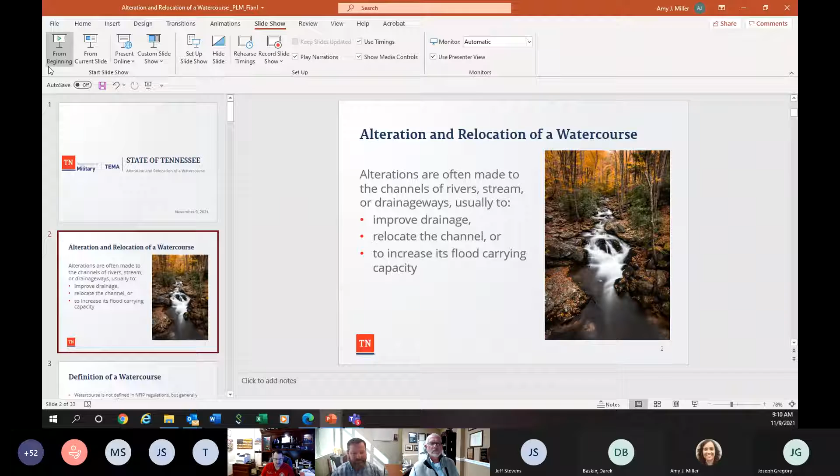Let's talk about stream alterations or relocations and what that means specifically for floodplain administrators. When we think about an alteration or relocation of a watercourse, really what that means is changes made to the channels of a river, stream, or drainage way. Most of the time it's focused on improving drainage for the area, maybe relocating the channel or trying to increase its flood carrying capacity.

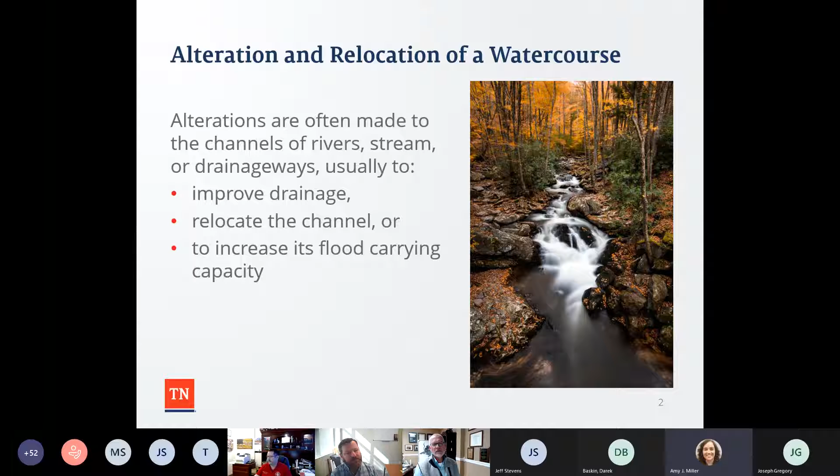The definition of a watercourse is not necessarily defined in the NFIP regulations, but it really means the channel of a river, stream, or drainage way, not the adjacent overbank areas. If there's placement of fill in the overbank areas but outside the channel, it's not considered an alteration or relocation of a watercourse. The overbank areas are addressed under the NFIP floodway requirement.

So if there's any kind of improvement, change, grading, filling, or excavating of a floodway area, there has to be an engineering analysis, and that's part of the Tennessee No Rise guidance document. Watercourses include not only rivers and streams that are the source of flooding, but also smaller streams, drainage ways, and ditches within the floodplain.

Having a site plan is really important to show what's there on the ground, and even going out and doing an inspection to see what's going on the site. Sometimes you can have unmapped streams going through a piece of property, and if someone is putting in a culvert or changing or altering it, that needs to be addressed. So having good over-the-counter consultation is important.

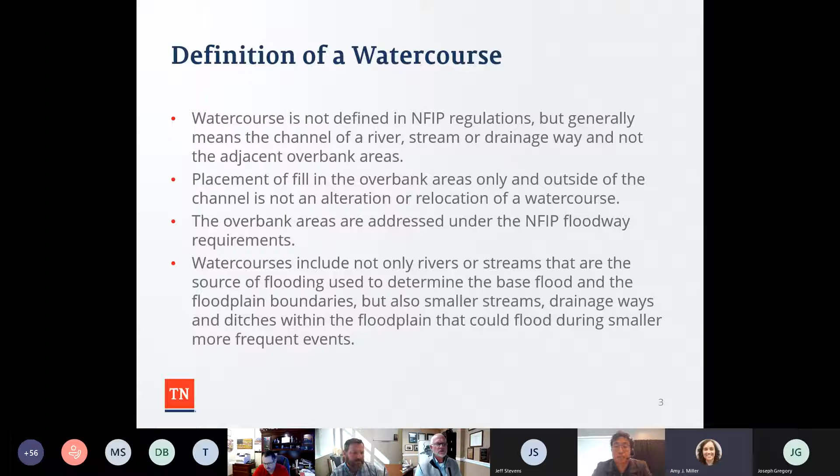When we think about having an alteration or relocation, there are two requirements that must be met to maintain the flood carrying capacity. First, it has to have the same or greater capacity as the original watercourse. Additionally, once it is altered, the capacity of the altered or relocated watercourse must be maintained over time. A lot of times you can see where a stream has been altered or relocated, and over time, Mother Nature will try to put the stream back to its original location.

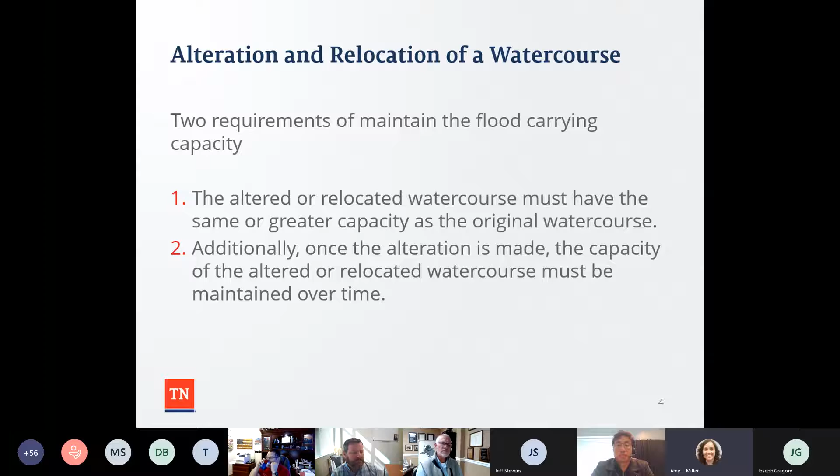So whenever there's going to be a change made to a stream or a body of water, you want to make sure that is maintained over time, and how the property owners or the community is going to address it is important when talking about these types of projects.

Floodplain administrator duties—I can't stress this enough. A lot of times when a floodplain administrator has a question or there's a project coming into a community, the first thing a lot of y'all do is get a little anxious or upset about it. But the thing to do is sit down and talk with the applicant about what they're proposing. The next thing to do is look at your local floodplain regulations to see what certain criteria need to be met.

I met with a floodplain administrator about 2 weeks ago, and she said, hey, what are our elevation requirements? I don't see anything within the document. So I asked her to go get her resolution, and we flipped a couple pages beyond where she was at.

And she said, oh, I haven't read that far. So some of you guys, when you have downtime, I'd encourage you to sit down and look at some of the different requirements, whether it's for recreational vehicles, manufactured homes, floodway requirements for zone AE, zone A, unmapped streams, what a variance should be allowed, or what the process is. Because some of your communities have planning commissions, boards of aldermen or county commissioners, and some of you have the 4-hour yearly training and aren't quite sure what topics to cover. The National Flood Insurance Program would be an awesome topic, or hazard mitigation grants. There's a plethora of different topics you can talk to your local community about. So if you haven't taken the time to read your regulations, or aren't quite sure what's what, now would be a great time to do that.

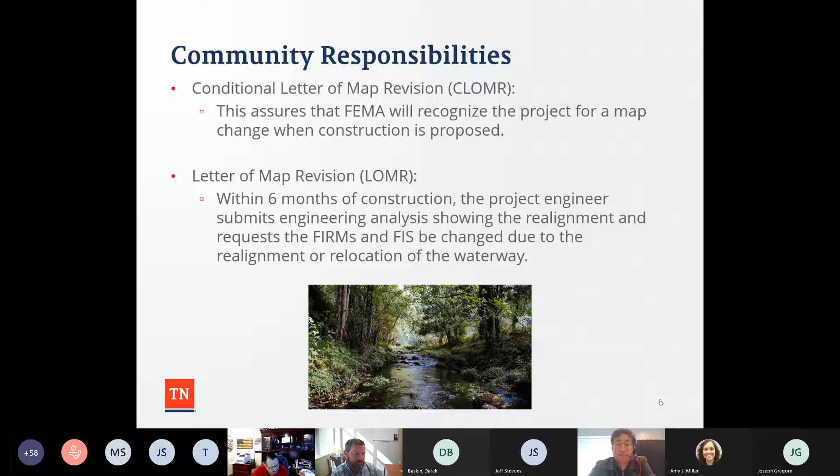So just as an added bonus for you all, sometimes when we talk to different stakeholders, project engineers, applicants, they always ask where this regulation came from. As we've talked about numerous times, FEMA has a Code of Federal Regulations that documents all the program standards. So sometimes people say, well, it's just Amy Miller standards, whatever Amy says, that's what you have to do. And it's not my requirements, it's FEMA's requirements.

So 60.3B6 essentially says that you have to notify my office prior to any alteration or relocation. And then B7 talks about making sure that the flood carrying capacity is maintained. So even though that's within your regulations, it is a federal requirement for all 22,000 plus communities that if there is any kind of alteration or relocation, that my office is notified, adjacent communities are affected or notified.

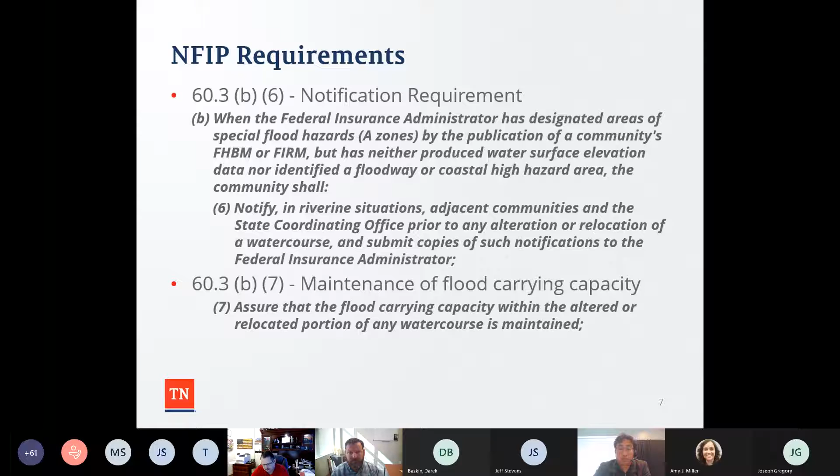So for carrying capacity, the National Flood Insurance Program again has to be applied to all water courses that are in a mapped floodplain. A lot of times we see work that's done in a Zone A for rural communities where no base flood elevations have been provided by FEMA. And requirements are particularly important because if there are no floodways designated and no other requirements, that would preserve the flood capacity to maintain those floodwaters.

So if you have a Zone A stream, there's going to have to be additional work done by a surveyor to survey the area to delineate where the floodway would be, that main channel, and then doing elevations to see the impact of the relocation or alteration, and then also addressing flood carrying capacity. So sometimes you can have a Zone A stream going to be altered or relocated, and then you can have additional technical data that can maybe take that from a Zone A to a Zone AE with some additional information that can make additional development in the area better because you have that detailed information.

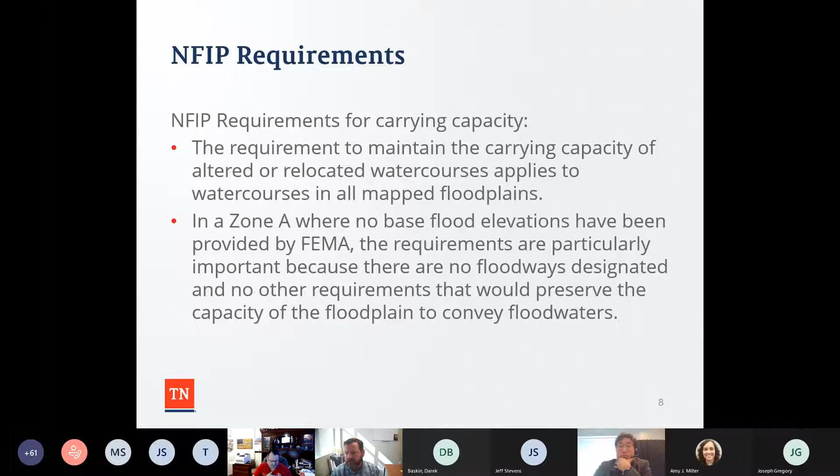So failure to maintain carrying capacity can create numerous flood problems. A lot of times, especially since COVID has started, I'm the angry citizen hotline. A lot of people will sit at home and they will watch their neighbors and they will see that they're doing different types of activities in the floodplain, whether permitted or unpermitted, and they'll call my office and say, hey, my neighbor's putting fill near the stream bank, or my neighbor's putting fill on the lot. Every day it's a different phone call with a different issue.

So again, you want to make sure that with this, that it's going to be maintained. Because one thing that we talked about yesterday with a county mayor was talking about subdivision regulations and especially stormwater management. One thing that I always ask whenever I see a major subdivision that's in the floodplain, the question is: is a culvert going to protect for the 1% annual chance of flood?

A lot of times when you guys get various development packages or projects, stormwater management is really important, because if it's not going to protect to the 1% annual chance of flooding, then what can happen is when you have a flash flood event, if it's only protecting for the 10-year storm event or 50-year, when you have a flash flood event, folks are going to experience flooding in their backyard or potentially in the subdivision or their homes.

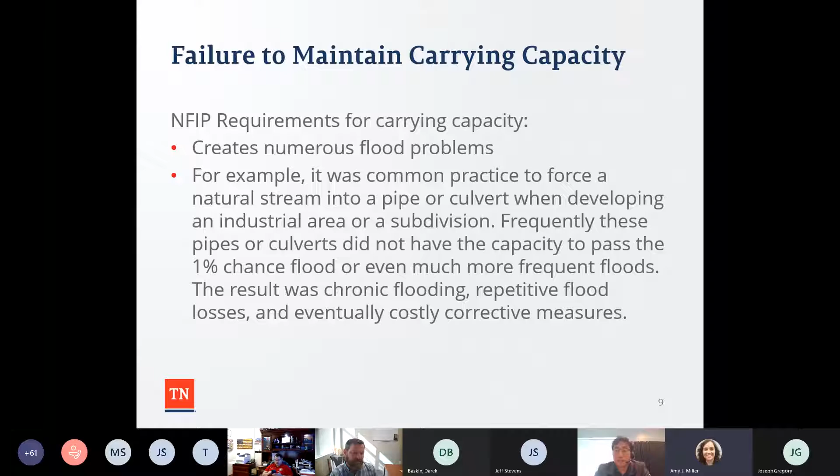You want to make sure that when you're having a major subdivision coming into your area, whether it's in the floodplain or not, the engineer addresses and you know what level of protection that culvert or pipe is going to provide, especially for industrial areas or subdivisions over time. I met with an individual last Friday and we were talking about a major subdivision near a Walmart, where when it rains, water drifts from the retention ponds of Walmart into the subdivision, and their culverts and pipes don't address all that stormwater over time. So it makes it really difficult.

When we think about Zone A, Zone AE, and alterations, Zone AE with a floodway, you want requirements to continue to apply to the channel of the river or stream. The floodway designation will prevent encroachments in the floodplain that cause more than a 1 foot increase in the flood stage. And again, the 1 foot is part of the Code of Federal Regulations.

If there's anything over a foot and there are insurable structures, and you submit that engineering analysis to FEMA as a conditional letter of map revision, they will deny it. That's part of those regulations right there. Again, notify my office and make sure that you maintain the flood carrying capacity.

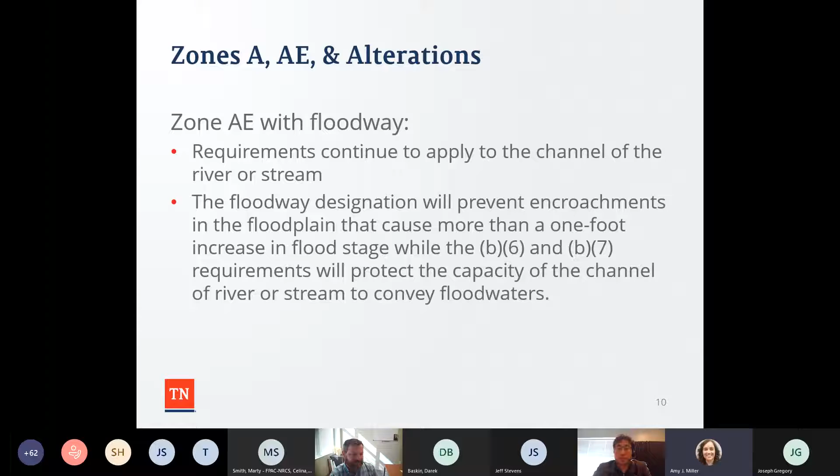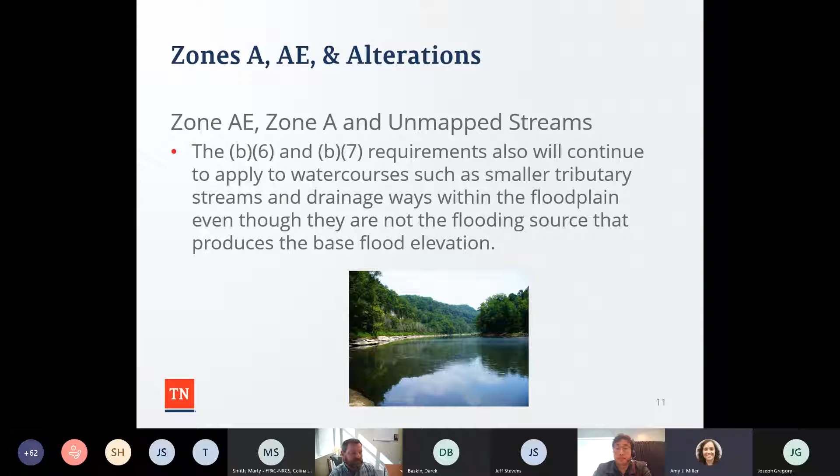You want to make sure it applies to the water courses and smaller tributary streams and drainage ways within the floodplain, and that it doesn't produce additional flooding in areas, as we talked about earlier. For Zone A streams, the analysis can be as simple as a community engineer reviewing the proposal.

But again, I would caution that if you have a proposal submitted, it be submitted to my office. Unfortunately, we've had over probably 110 submittals, and we have not had a complete application package, nor a complete and correct submittal.

So to take some of that liability off local communities, engineering reviews as part of my office are always available to every single community, because we want it to be compliant. If it isn't compliant, there could potentially be a lawsuit, whether from the project engineer or against the local community for not enforcing the regulations.

Whether it's Zone AE, Zone A, or unmapped streams, you want to make sure there's an engineering analysis when there's an alteration or relocation, and that the channel size and cross sections are as big and the channel is as straight as the original water course, with smooth hydraulic transitions into and out of the altered or relocated portion.

That's really important because you want it smooth so that when floodwaters enter and exit, you're not causing additional flooding to adjacent properties. Also make sure the sides and bottoms are the same or similar materials to the original water course, and look at the roughness coefficient—is it smooth, rocky, or is there sedimentation or other factors?

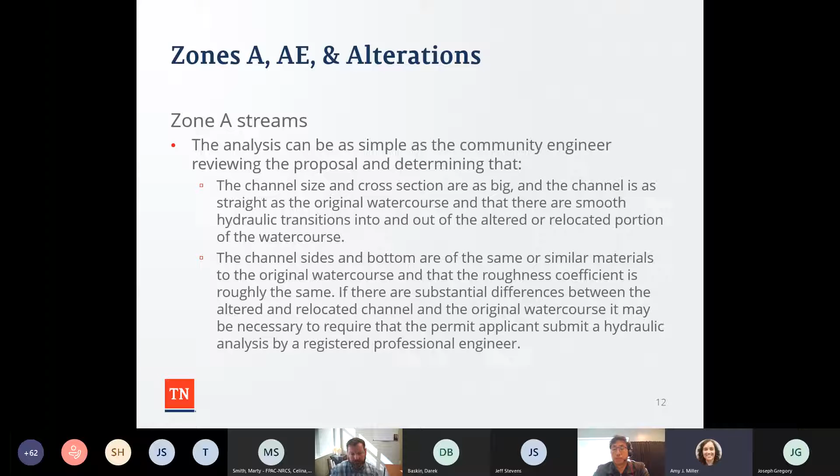So in a non-maintained water course, sometimes an artificial condition is created and you can have erosion of the banks and sedimentation could occur, which decreases the capacity of the channel to carry flood flows. Sometimes someone altered it, and over time Mother Nature tries to meander it back to the old location, and vegetation can grow, choking the area. Any benefits from the original project can be lost, and flood hazards can increase.

Now, a lot of times whenever there's a flood event, one of the first things I hear from folks is, well, just go in and clear out all the vegetation in the stream bank, allow the water to go from point A to point B unobstructed. And we all know that TDEC will not issue those sort of permits for that type of activity. So you want to try to work with nature and make sure that when a project is being proposed, these particular issues are addressed.

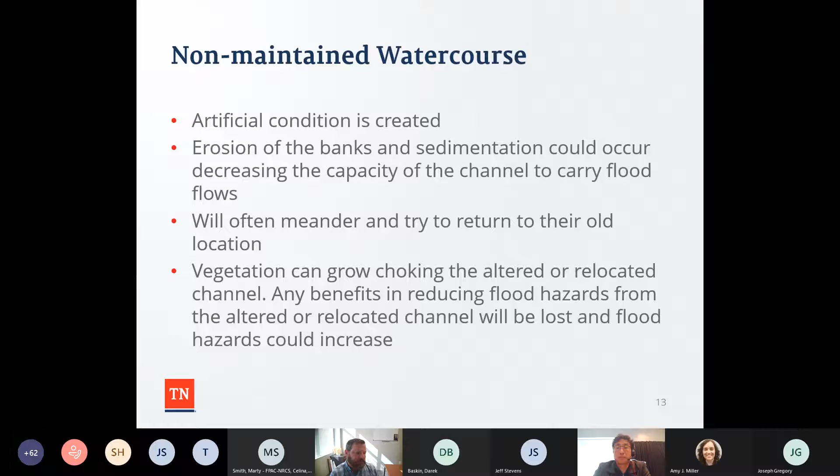So riparian management is fundamental for supporting proper stream corridor function and making sure it's a fully functioning stream. This picture here is near and dear because it's a picture from back home, cows in the stream. My agricultural education degree would say that the farmer needs to have a conservation plan to make sure the cows aren't in the stream.

But there's some other things when you're looking at riparian management, if there's adjacent agricultural operations, how is that going to affect alteration or relocation of a stream? Livestock grazing practices—maybe you have fences up so far from the stream, like farm fence, to make sure the cattle can't graze clear to the stream bank.

Forest harvesting practices—one time I was in a community in East Tennessee, driving through a floodplain, and all of a sudden the guy hemmed me in so I couldn't back up, couldn't leave, and he said, hey, there's this issue where they're harvesting trees, and every time it floods there's a mud flow that comes towards my house, I'm having issues. So you want to make sure that when people are harvesting trees, say on steep slopes, how are they going to address flooding and mudslides that could potentially occur?

Road building and urbanization all affect riparian management as far as making sure a stream functions. As Tennessee continues to develop, these will continue to be issues, especially urbanization and road building, making sure sites are reasonably safe from flooding, making sure utilities are flood-proof and water resistant, and that flooding doesn't accumulate in various types of utilities—that's really important.

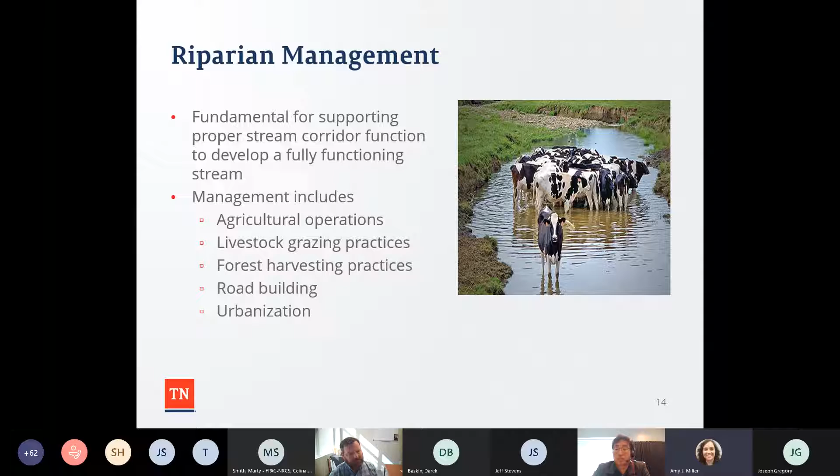Data compilation is really important when engineering analyses are being done, because the project engineer has to collect existing available data as far as current conditions, including stream flows. Some streams have gauges so you know what the stream flow is, others do not, so obtaining that information is really important.

Water diversion, water quality data, flow frequency data, biologic inventories, working with the U.S. Fish and Wildlife Service to know if there's any kind of endangered species, if you're going to be altering or relocating, and how that affects vegetation and animals in the area and aquatic life.

And then have aerial imagery, soil information, and elevation data. We're really fortunate in Tennessee to have LIDAR data done for the state. I believe West Tennessee will be done soon, so we'll have the whole state with LIDAR data. If you need that information, you can go to the state of Tennessee GIS website, or just Google Tennessee LIDAR data to obtain that if you're working with someone doing a project in your local community.

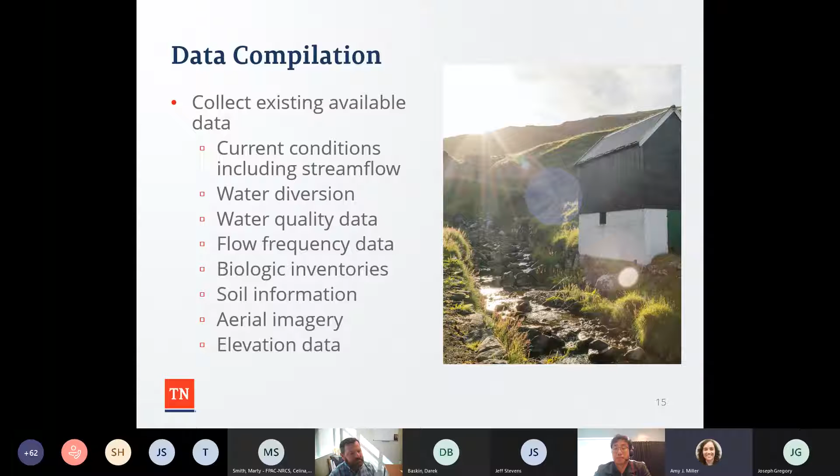Historic information—the flood insurance study guide for each community does have historic information as far as flood events that have happened in each individual community. So you want to make sure that historic data is implemented into a project to make sure that you promote the historic condition, if that's accurate.

If you guys were ever to go to Ohio State, there's Mirror Lake. It used to be just a round kind of circular lake, and then they decided to go in there and reconfigure it, realign it back to its historic condition, so that when there's a flood event, the stream and the pond are back to how it was a long time ago, and the elements that led to the degradation have been alleviated.

So again, understanding the impacts of the stream, some of the issues that it has, and making sure that you put that into the project is really important.

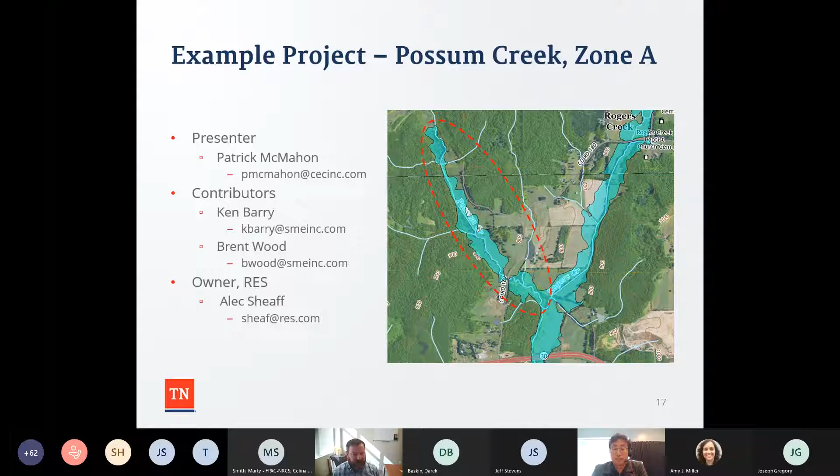So when you get into these projects, the first thing is due diligence, getting together a meaningful and complete proposal. From the engineer's standpoint, one of the first things we're going to do is go look at the flood damage prevention resolution or ordinance in that county or municipality and make sure we understand how it is set up. There is the blanket ordinance you can adopt that has all the requirements you would need to address to be in compliance with the NFIP program.

Some communities adopt more stringent requirements, and then there are some gray areas where communities will do a few different things with their program to meet their needs in the community. So we first want to get really intimately familiar with that information.

The second order of business is to contact the floodplain administrator, who is a critical piece to the NFIP program and process whenever we're working in floodplains. So we want to get involved with the floodplain administrator very early and start talking about the project. In this particular instance, immediately we were running into some challenges.

We got into the flood damage prevention resolution and said, okay, great, it's the county planner that we need to be talking to. So we reach out to the county planner, and we're not getting any responses. Come to find out, unfortunately, the county planner had recently and suddenly passed away due to natural causes, and the county was a little bit at a loss for reassigning the responsibilities of the county planner.

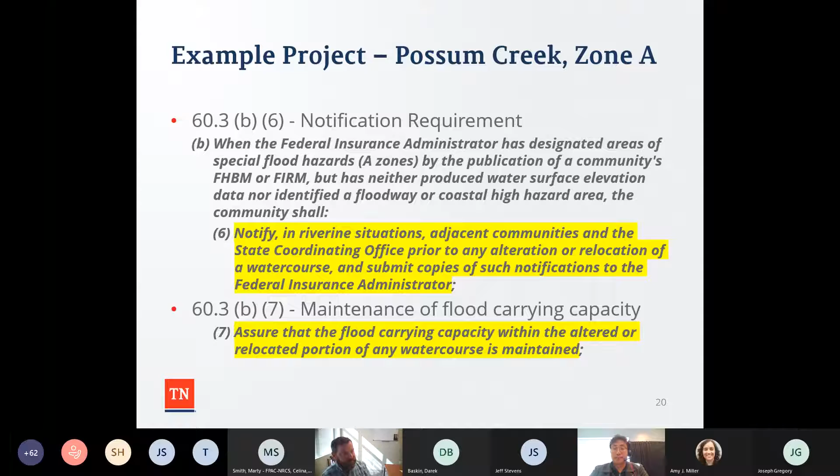What'd you say, Amy? I was just agreeing with you. Okay, all right, let's go on to the next one. Thank you.

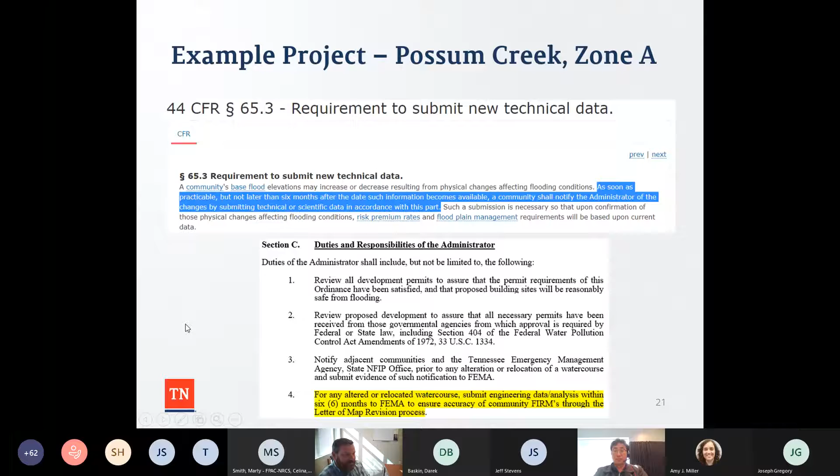Okay, so some easy takeaways. If you are relocating a stream in a Zone A - and this is what we learned through this process - the things you're going to have to do for sure, without question, is a hydraulic analysis for existing and proposed conditions, and that rise, if you have one, has to be less than a foot. You have to submit this information to the local floodplain administrator for review and approval as part of the floodplain development permit process. I say comment/approval because they're not going to approve it until they're pleased that it checks all the boxes it needs to check, and that's our responsibility to get done. Then there's community notification and verification for flood carrying capacity - those are two different things.

You want to notify adjacent communities if you've got a significant impact, which it wasn't in this instance, but I could imagine, say, a Zone A project that, while it doesn't cause more than a 1 foot rise in the base flood elevation, maybe it causes several acres of sub-1-foot flooding.

That would be considered significant, particularly if it's encroaching on roads or homes. Even though it's less than 1 foot, it's significant, and you would want to notify the adjacent communities. I also don't think that would be a very sound project because you probably wouldn't want to be impacting structures or roads, so unlikely you'd find yourself in that boat.

But the other things you need to be aware of: it's possible you'll need to do a letter of map revision within the next 6 months. Depends on local ordinance and the interpretation and significance of any changes to mapped features. There may be additional requirements. The floodplain administrator is actually a pretty strong position and has a lot of latitude to require additional information as they see fit. All right, we can go to the next slide.

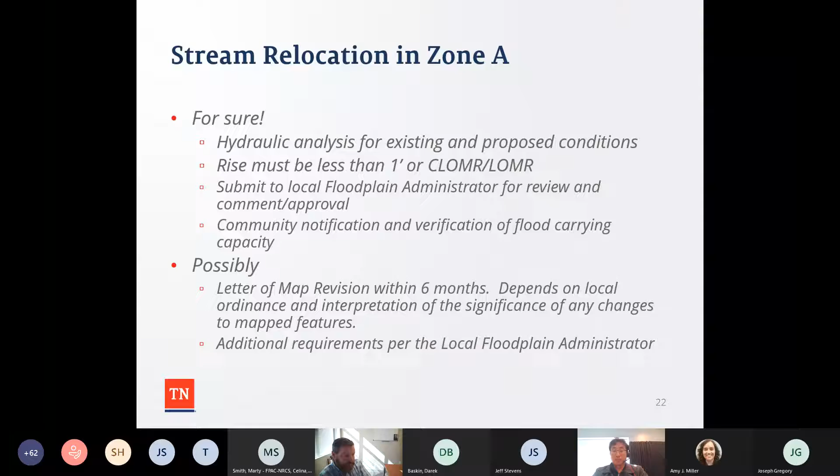In this instance, because the floodplain administrator position was temporarily vacant, Amy stepped in and said, we will act on their behalf. So we developed a plan because this was the first time we worked on a Zone A relocation, and it turns out that was the first one Amy had worked on as well. So we were on both sides of the fence trying to make sure we did everything correctly. The plan we developed was to create an existing and proposed hydraulic analysis and report.

We knew what the alignment generally was of the stream we wanted to relocate. Flooding was pretty much valley controlled. And then our cross sections, because the design was moving forward with the permitting, we decided to use all riffle cross sections within the banks to be conservative. We needed to show, or needed the analysis to demonstrate, that our floodplain rise was less than a foot between existing and proposed based on those models. And if it wasn't, we either needed to revise the design or move on with a CLOMR.

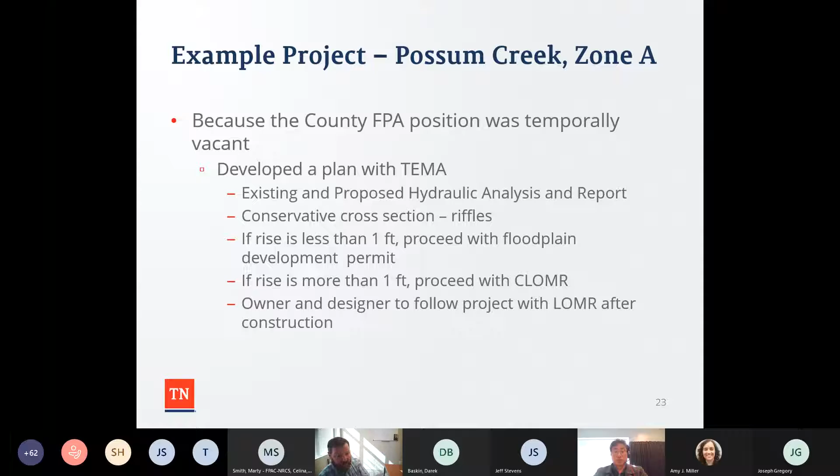In the plan we developed, the state said the owner and the designer should follow the project with a LOMR after construction, which is a reasonable request they made on behalf of the county, and that was the requirement that was agreed to. Okay, let's go to the next one.

So we went through 3 rounds of review. There were some easy comments to address, and some we weren't aware of until we got into it that we were needing to do this. One, we had to extend the analysis down to the next confluence in the Zone A, which was not terribly far downstream, so that was not a big deal.

Sometimes the results in your floodplain mapping give you tables that say here's your flooded width, and that may not match what's shown on your maps. That can be an indicator that something's wrong. It can also be caused by dry areas in your cross section. In this case, we had some of those. So while it appeared to be a discrepancy between the model results and the mapping, it was not — it was explainable. So we worked through that.

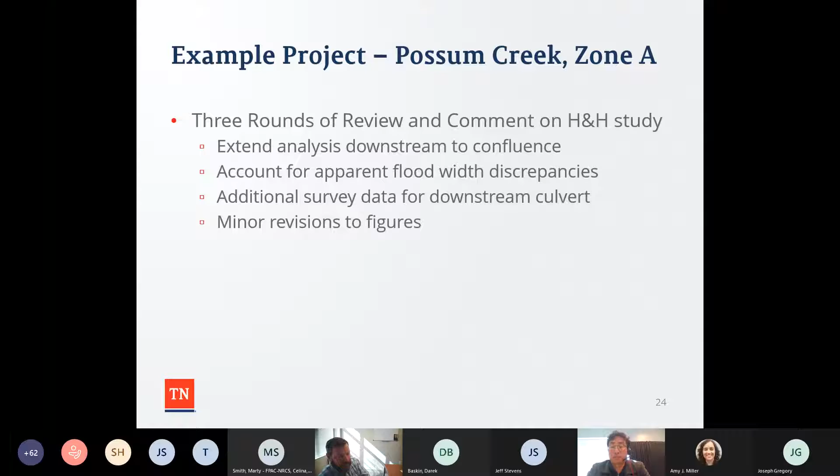Some additional survey was asked for, which is a reasonable request. So we tidied up the survey, and then made some minor revisions to figures. Let's go on to slide 25. So in the end — oops, roll back one.

There you go. In the end, we got a nice letter from Amy saying we've reviewed it, you've met all the requirements of the Code of Federal Regulations. And while Amy cannot issue that floodplain development permit, she can say that the county should have no reason not to, based on the FEMA requirements. So we got through that hurdle on the project.

And Amy, I'll let you go to the next one. I believe this is the last slide. The project has not been constructed yet, and I don't have a time frame other than sometime soon. It is advertised by the owner on their website, but does not yet have a construction date. So we're going to keep an eye on that.

Some takeaway points: educate and inform your client, and then as the floodplain administrator, you're going to be getting contacted by engineers at the start of these projects. You should be getting contacted, and use your engineers as resources. We do this work day in and day out. I know a lot of you probably do 50 other things other than being a floodplain administrator for your community. So if you have questions, Amy's an excellent resource, and so is your engineering community.

You want to establish your compliance criteria at the proposal stage. You do not want to get halfway through a design and be surprised that you're going to have to go down a completely different path for your floodplain permit than what you thought. You want to know that up front.

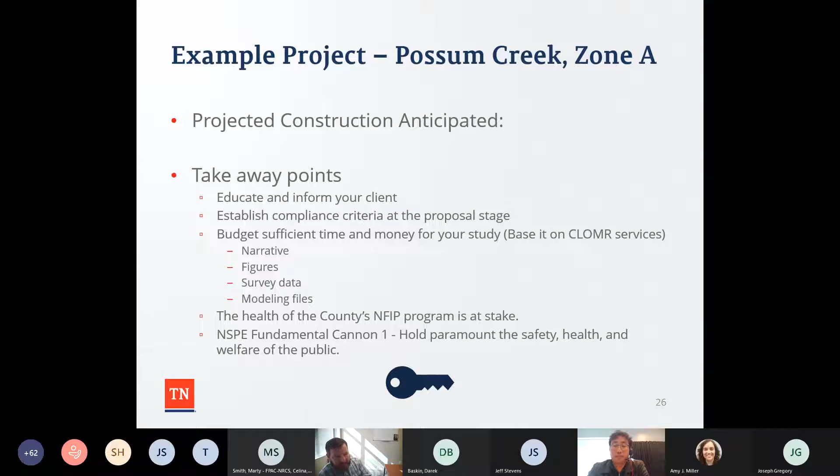Good morning, all. Can you hear me? Yes.

All right, my name is Yong Jung. I'm with AECOM, and we're the study contractor for the state of Tennessee for the engineering review. Amy, you can go to the detail study slide. I can cover this MT2 form at the end.

Can you advance to the next slide? Okay, so Amy covered the topic really well from the state NFIP coordinator standpoint, and Patrick covered the topic from the engineering standpoint, so I'm doing the FEMA reviewing stuff for all my professions. Let me go through this topic from the FEMA reviewer standpoint.

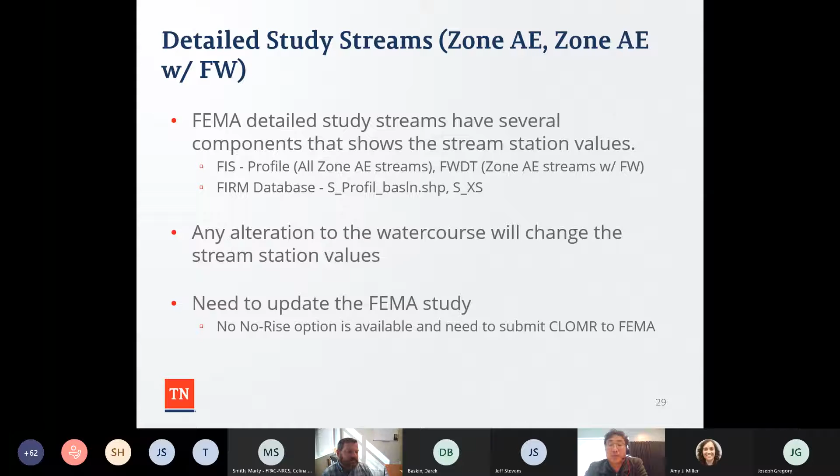Next is form number 3, the riverine structure form. If you look at section B, they're talking about channelizations. Basically, if you look at the instructions of that MT2 form, they describe that if there's any changes or alterations made on the stream channels, you have to fill out this form and attach the plan certified by a registered professional engineer.

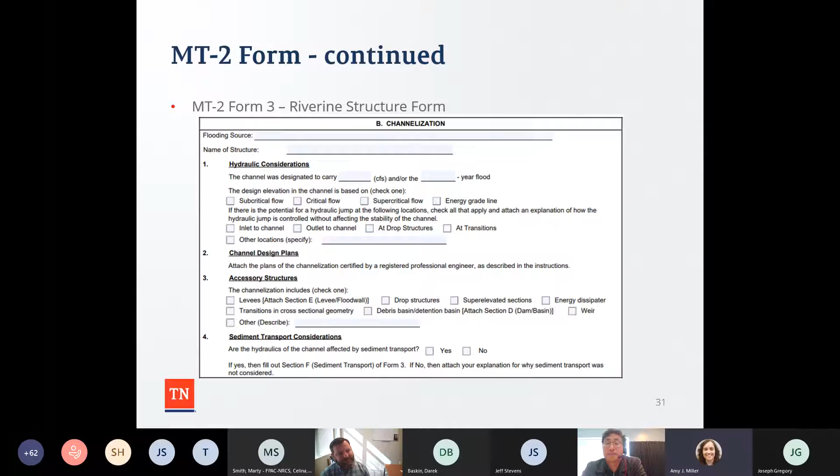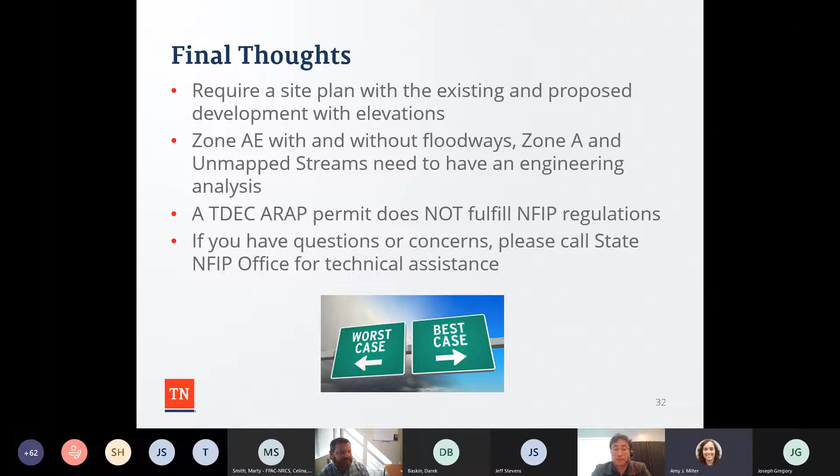This is Carrie Williamson with the Tennessee Valley Authority. Can you hear me? Yes. Okay, great. So thank you for the presentations today, this is very helpful.

It's not quite, well, it is an alteration, but I'm with the Tennessee Valley Authority, and we're looking at a couple of projects here in the last year or so, where people are contemplating removing low-head dams in some streams to improve public safety. Those hydraulic rollers are deadly, so people are looking at removing those. Have you all dealt with any of those type projects in other areas of the state? And if so, what are you seeing that works, and what advice would you give for somebody embarking on one of these? Thank you.

Good morning, Carrie. Unfortunately, I don't like the answer I'm about to say, but we have not been contacted by any community statewide with this issue at all. I've run into it a bit in other states, and I'll say that you probably want to get FEMA Region 4 involved. And Amy, you can jump in here if I'm off base.